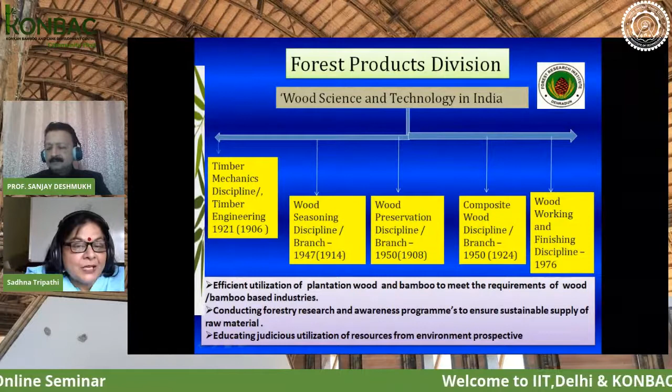The next one is composite wood, which deals with composite products like panel products, and every section has an expert team. The next one is woodworking and finishing, where we develop finishes and their correlation with moisture content, how much finish is required for bamboo or any wood species. We are basically focusing on the efficient, judicious utilization of wood and bamboo.

We conduct forestry research, awareness programs and capacity building programs. Besides that, we have a university also, the Forest Research Institute deemed university. We are running different post-graduation courses, and wood science and technology is one of them. So we have technical manpower trained in the particular department. Next one, please.

So I have just shown the recent work we are doing. Bamboo extract I have already described. In the preservation branch, we are working on fire retardant preservative compositions. The preservative is basically for the longevity of any product. But when it is combined with fire retardants, we have to develop protocols for how it works, so that it gives protection against biological agencies as well as fire. We are also working on durability assessment of bamboo in the field.

It is not only the development of the preservative. Recently, we have developed an eco-friendly preservative called ZIBOC, which is accepted in the Bureau of Indian Standards 401. It is environment friendly and comparable with the conventional preservatives ASCU and CCB, which are known all over the world for their efficacy.

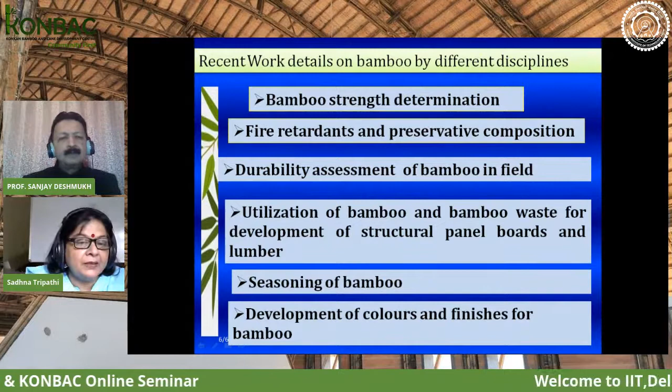On the basis of that, we develop the preservative. So we are developing eco-friendly preservatives. We are developing the preservative plus fire retardant combinations. We are testing it, and so on. And the next branch is we are also working on the bamboo waste and development of structural panel products in the composite branch. Seasoning of bamboo I have already covered. Then the color and finishes. Next one. Next one, please.

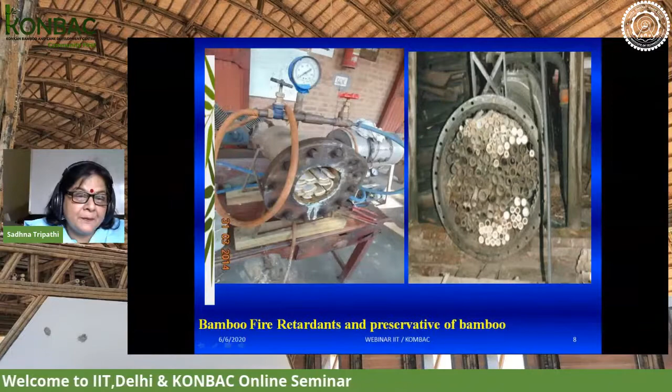It is performed in the wood, it is performed in the bamboo, it is performed in the ply products. So it is a well developed plan which we do here. Whenever we report any preservative or any product, it is mandatory to go through all these tests. Only then we can report, yes, this product is working. Next, please.

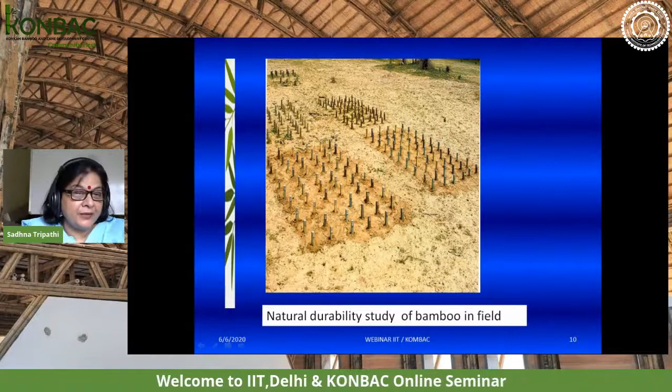This is a yard test. You can see that a certain size of the sample is embedded in the ground after treatment, or we take the control at different locations, and periodic inspections we conduct. And it is recommended that if the product is working for 10 years, then you can say that this product can be recommended. So ZIBOC, we have already tested it for 12 years. So after that, it was accepted in 401 standard, and now it is going to be printed. So this is a sort of thorough examination of any preservative or any wood or any bamboo which is treated. Next one.

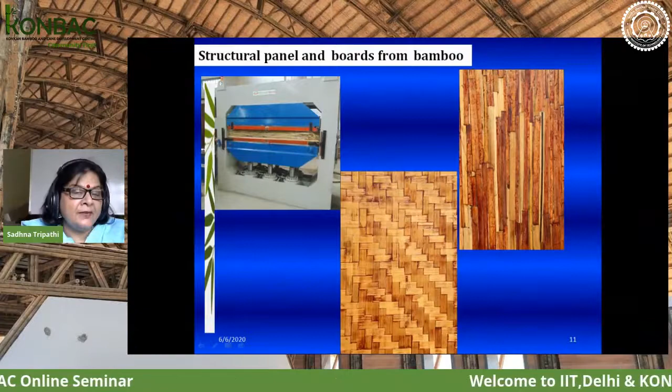This is the structural panel boards. We have a full-fledged laboratory where we have the press, hot press. We make the products, we test it, and developmental. There are so many things in the developmental phases, but still there are many things ready for the field also. Next, please.

We are four speakers in the session. I know that everybody will be talking about why bamboo, but I'll be talking from the forestry perspective only, from the forestry point of view. We know that it has faster growth. Why? Because only the longitudinal growth is there. There is no lateral growth. If you see the tree, you will find the secondary wood and the primary wood, and the sapwood and the heartwood. Whereas in case of the bamboo, we don't have any wood. Only the longitudinal growth is there. That is why the growth is very fast.

So the advantage is that faster growth is there. In 4 years or 5 years, you can have this material, and it can be harvested annually, non-destructively. You are not going to harm. You don't have to dig out all of the material from the soil. Again, through rhizomes, it will be flourishing there. It will regenerate the degraded land. It can be intercropped with the shallow-rooted crops. It helps to prevent soil erosion, and there are so many properties. That is why we say that bamboo should be used and should be considered in place of the wood.

Next one. Madam, will you be able to wind up within 3 to 4 minutes? Yeah, sure. Why not?

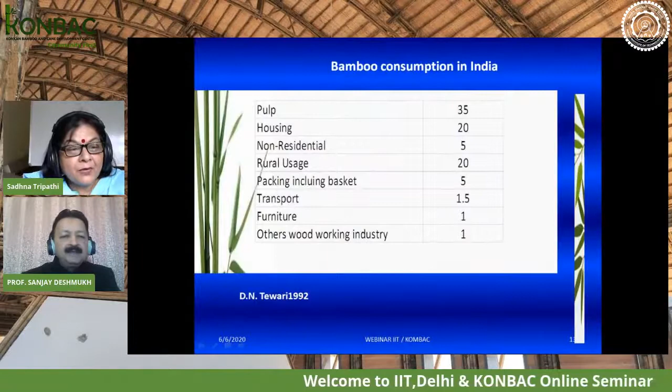So this is just the data. You can see that 35 to 40% goes to the pulp, whereas for non-residential and residential purposes, almost 40%. That means that we are well on the ground. That is why we should justify why we should use the bamboo, because more than 40% goes for this sector. So we should again think of using this material. Next one, please.

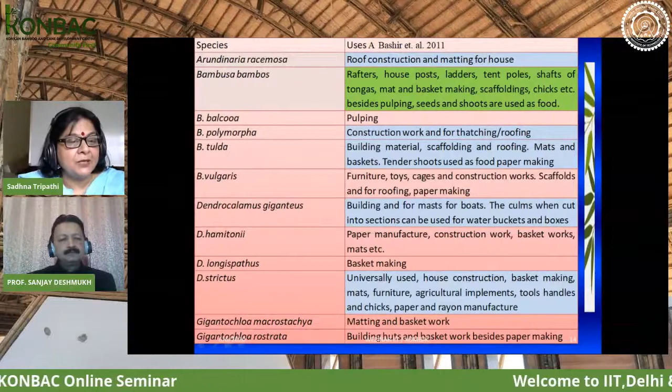These are categorized on the basis of their structures. You can see that many times people are asking for this: we have this bamboo, for which use should it be? We have a long list. I have shown one, Bashir et al. In 2011, he categorized all sorts of bamboos for different uses. Next one, please.

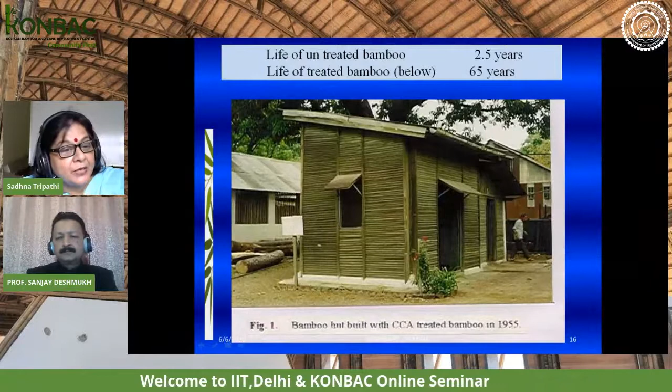This is a hut which was made in 1955. This is a plant area where we work, and it was made in 1955. Now 65 years have already passed. You can see how much longevity is there. Otherwise, bamboo has a natural durability of 2.5 years only. So you can see it is in the open and it is working. Next one, please.

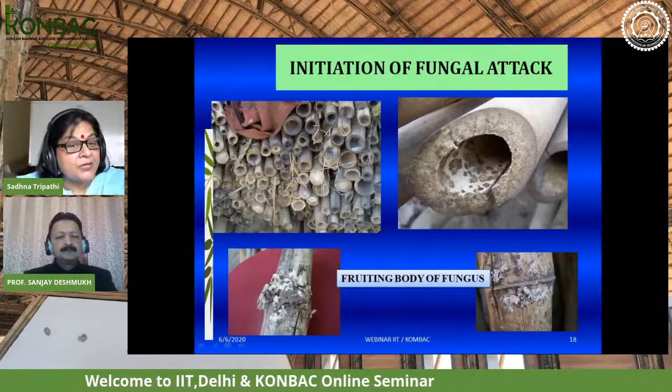These are the conditions which are basically responsible for the decay. Next. This is the initial stage. Whenever you see any sort of infestation, you have to remove the material from the lot, because this shows that all conditions are favorable for attack. Next. These are all sorts of molds, and they are just decreasing the value of the product. So we have to check it. Next.

These are the termites, the borers and the pests, especially beetles, powder post. They are enemies of the product.

Next. Madam, you have about 1 minute. Yeah, sure. Now go to the next one.

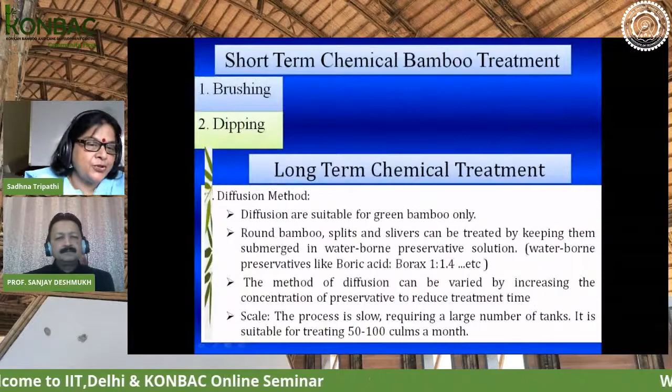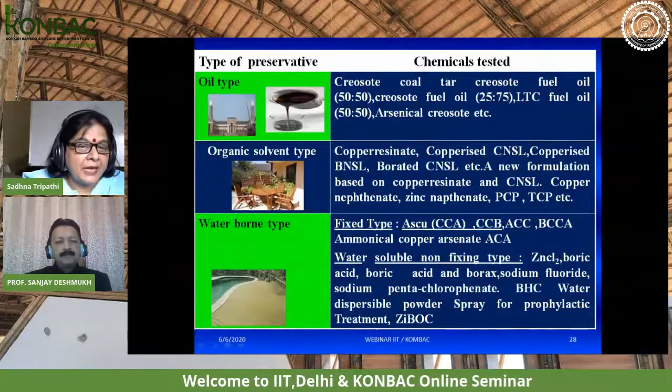So this is how we check, how we treat. Next. These are the types of preservatives. Here you can see in the third, water-borne: Ascu, CCB, CCA, ACC. These are all preservatives which are water soluble, so no solvent is required. Just make the 4% solution and treat the bamboo. Next, please. These are the procedures. Because of the time constraint, I won't be going in detail.

Next, please. Madam, will you be able to summarize now? Yeah, sure.

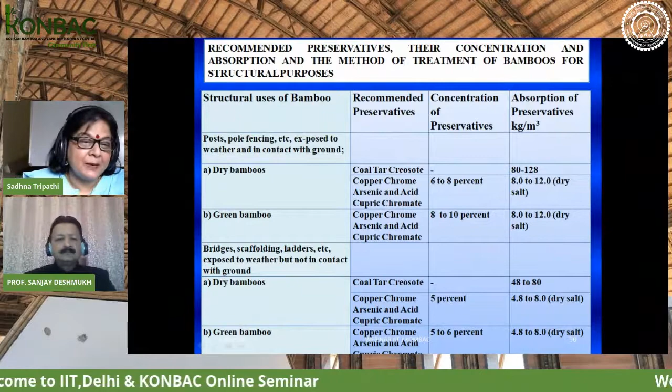These are the different usages. Dry bamboos, you can see in the second column, which type of preservative, what should be the concentration of the preservative, then what should be the retention. Only if the proper retention is there is it going to survive. Next, please. You can have the hyperlink.

Madam, I think you'll have to summarize now within a minute. Okay, can you kindly show that? Just flash and go on.

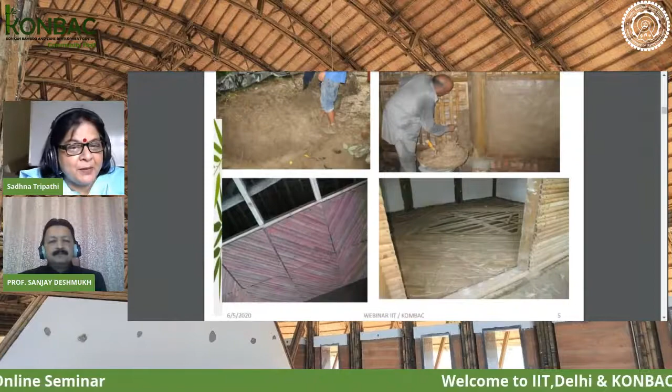You can see how we are making the structure, how we are making the mesh. Next, please. We have made the structure. It was made in 2008 with the preservatives. The floor. Next, go ahead. How the mud is with the fire retardant and the preservatives. Next, please. The floor. Next one. These structures we have already shown you.

The shed was made in 2006. Still it is there. So now you can calculate the economics. You have saved the material, the money, and the labor for 10, 12 or 15 years. So that is the simple justification for why we should preserve wood or bamboo. Next, please. These are the recent works which we have done in the green skill development program.

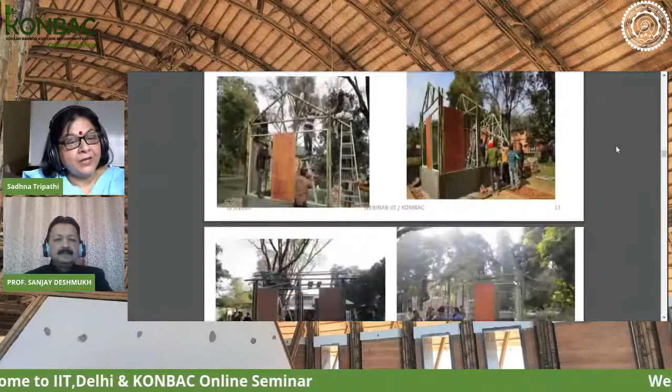Educated crowd was there, youths were there, they were trained in all sorts of structures. All treated structures are there, and we hope that it will be there for the next 50 years. That is all. Thank you so much.

Thank you very much, madam. And as all of you must have heard, madam, it was such a lucid presentation, and the expertise of madam in the field of bamboo development was evident from her presentation.

We have our second eminent speaker, Dr. Vipin Chawla. Dr. Vipin Chawla is working as a scientist E at IPIRTI, that is Indian Plywood Industries Research Institute, located in Bangalore. Dr. Chawla has been working on various aspects of sustainable byproducts of wood, and bamboo is one of the very prominent aspects of this particular research. Dr. Chawla has also been expert in fundraising and also implementing the projects on sustained basis. Today's presentation will be based on bamboo composite technology for housing structures.

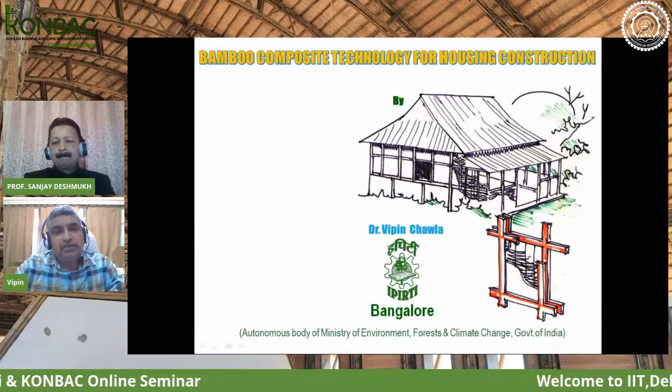Please upload the presentation. So, the topic given for today's discussion is bamboo composite technology for housing construction. IPIRTI has done a lot of work in establishing a technology, especially the bamboo composite technology, and implemented it in structures. Next, please.

So, as we have already discussed, there is easy availability, low cost, high strength to weight ratio, capacity to absorb more energy, and it is a renewable resource. But it has a drawback also. It has limited durability. Madam already discussed that. We have to treat it properly, otherwise it does not last for more than 1 or 2 years. And it also has a drawback in jointing of the structure, so we have to develop a jointing technique. We have done work in this line, and structural design data is also not that much available. Limited structural designs are available. Please next.

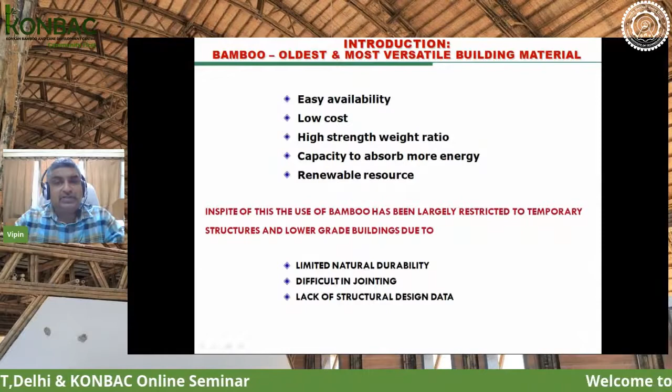So the advantage of structural application of bamboo is that it is easy to cut to the required size with a simple tool. We do not need to buy specific heavy machines or heavy tools to cut it. And the surface is very clean because it has a silica layer, and the epidermal layer is very hard to attack. So it is hard and smooth, and hence less wastage. And nodes add strength to the bamboo because of more lignin content in the joint; it has very good tensile strength, and skilled labor is not much required. Just giving a little instruction to the labor, they can handle it easily. And now it is under the National Building Code also. Next please.

So based on bamboo properties, MOR and MOE, modulus of rupture and modulus of elasticity, and maximum crushing stress, bamboo can be classified into three categories: group 1, group 2, group 3. Based on this group category, the structural engineer can decide which type of bamboo group can be used for the structural purpose. Next, please. Next.

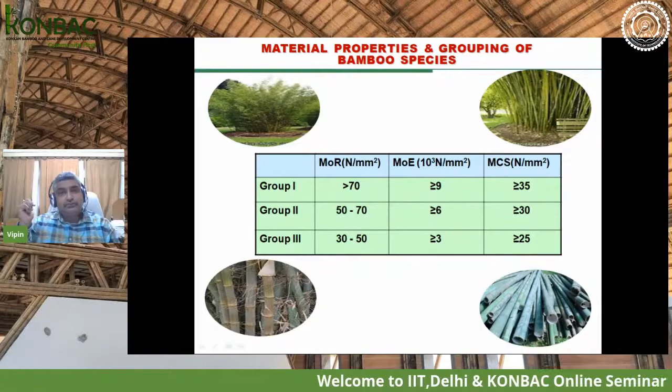So bamboo for building structures: affordability. Bamboo foundations are very minimal. Basically 2 feet of digging is sufficient and not much width is required. The foundation is simple, no heavy reinforcement of metal or other things required. Sustainability and environmental impact are there. Bamboo is available commercially in large quantity and the supply system is very good.

It's a good source. But during construction, we have to select only specific species of bamboo, and that species is the Balcooa species, and before application we have to treat it. It is a traditional material, so it is not a new material, it's a very old material, but we have to use it in a better engineering way. The result we can see in the next slides. Next, please.

So for building systems, we have to treat the bamboo as much as possible with the proper retention so that it can be long lasting. And nailing is not possible in the bamboo, so we have to wire it and bolt it, or make jigs, bolts and the like to make positive connectors. And modular construction is like that. It's suited to either prefabrication or fabrication to make a design, and in one place we can construct the structure.

So now we are going to the bamboo composite technology. We design the composites in the lab and plants, and then we can create structures in one place and shift them to another place. And the assembly is very easy, just simple nuts and bolts, tie it and install it, like in the construction of the metro bridges and all these things. Next, please.

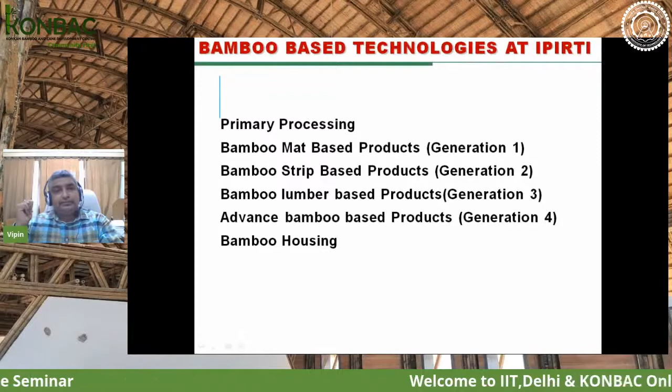And all of these generations we are using in housing construction. So the purpose of this bamboo composite is to implement it in the bamboo housing structure. Next, please. So the primary processing consists of various lines of machines. The first machine is cross cutting, then the second machine is splitting, which splits the bamboo to the required width and thickness. And then we have to remove the epidermal layer and endodermal layer, which is not good for bonding purposes. And next is the slivers making. Next, please.

So after this slivers making and all these things, it has to go to the rural livelihood program. So it can be utilized, it can generate a lot of employment in the village area. So for mat sliver-based products, IPIRTI developed bamboo mat boards, bamboo mat veneer composite, bamboo mat composite, bamboo mat screen doors, bamboo mat corrugated sheets, bamboo mat ridge caps, and bamboo mattress. So these products are all developed from the mats. Next, please.

After this, we realized that mat-based products require a lot of manpower, so we went to mechanized products. So horizontal laminates and vertical laminates are the two products which can be used for flooring and other wall paneling purposes. In both the bamboo mat-based products and the strip-based products, the resin is common, phenolic resin. The specialty of IPIRTI in developing this composite technology is that we standardize the resin as per the product's requirement. So that technology is with us.

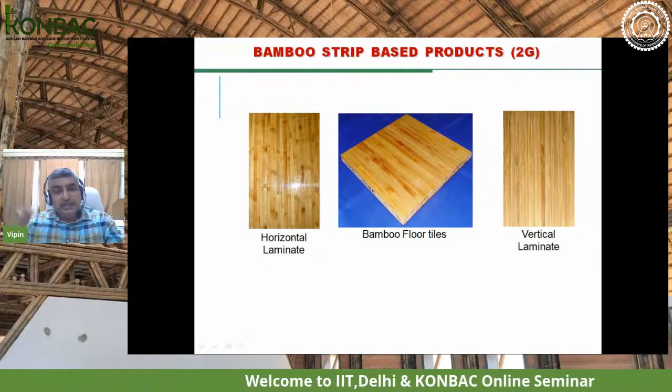Next, please. So we use these strip-based products for construction of theaters or stairs, or in halls or badminton halls. Next, please. So you can see the application. These are the applications of the laminates. So it's well defined. So the next product is the bamboo lumber.

As we know, bamboo is used for structural purposes, but in round shape it is very difficult to manage it in strip form. So just squeeze it like sugarcane in a machine and make a crushed form. So the first slide shows the crushed part, and under pressure and temperature, cold press or hot press, we can make it into lumber form. So this is like 6 feet by 6 feet length and 5 inch by 6 inch cross-sectional area; the lumber is produced in India by 2 or 3 companies.

So we have to treat all these things. We have to dip it in the resin, we have to press it, and then we have to cut it as per the requirement. Next, please. So these are the applications of the bamboo lumber. So the bamboo strip-based product is the second generation. Lumber is an advanced generation product. It's a highly finished product. Next.

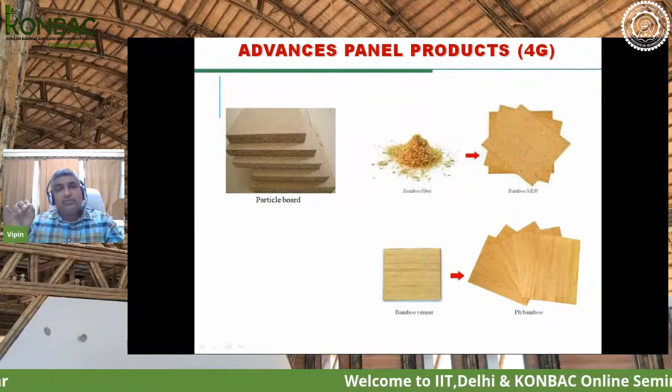So next product, which we can use to minimize wastage, is particle board and MDF. We just crush it and pass it to the press, and the press converts it to the board. This is also a good product, but due to high investment, not a single industry in India has it. So it is a big project for us, and it requires a lot of bamboo for processing.

In IPIRTI we have developed a TRADA technology. IPIRTI TRADA technology defines how to use the bamboo and makes it possible for engineered wall structures and all these things. This has already been explained by Sadhana madam, so I am not going to go in depth.

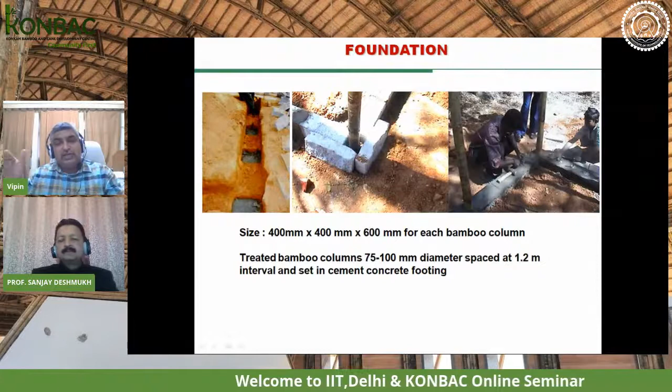While erecting these columns, we have to treat the ground also, otherwise termite or borer attack will start from this. We use suitable chemicals with good penetration effect, and we have to take care while treatment. The treated bamboo columns come in 75 to 100mm diameter with wall thickness of 10 to 12mm. Selection of the bamboo is a vital parameter for constructing the house. If the bamboo is not properly treated and not properly selected, the building may collapse, so we have to give importance to all these parameters.

Before the plinth and flooring, we have to use bamboo strips only. Normally wall thickness may be 9 to 12 inches, but in bamboo composite houses, the wall is about 3 to 5 inches. We reinforce the strips with chicken mesh using the same cement mortar ratio. This is the structure, how we use it for the walling purpose in IPIRTI.

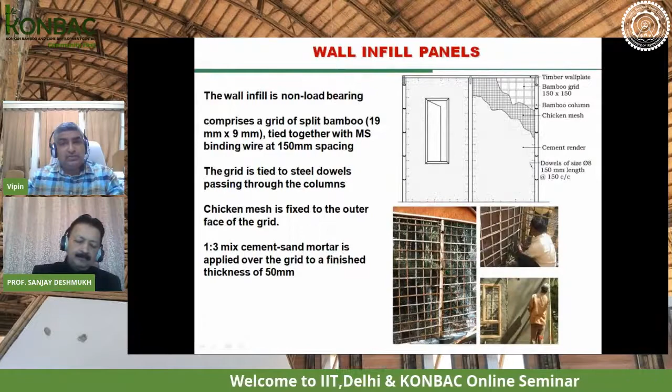And we have established this house all over India in maximum places.

So we use the corrugated sheet, utilizing it for structural purposes. We make it possible with clamping, J-bolt fixing, and all these things, but I will not go into details.

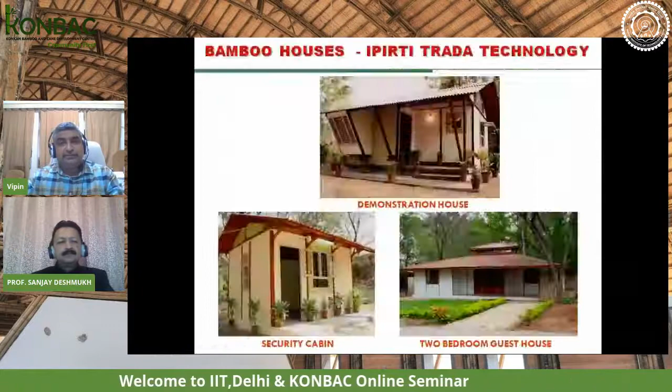So these are the various constructions we have developed in various places. You can see them here.

This is a prefab house. In this house, we do not use cement; the structure is constructed at some other place and installed at the site. These structures, first we put with the wooden structure, and second we create on concrete and iron structure.

We basically use bamboo mat board for the prefab house, double walling system. It has good high rigidity compared to plywood, good flexibility, and can be used for gussets and hollow beams. The double walling system gives better acoustic properties and better thermal properties, adding good importance to the building.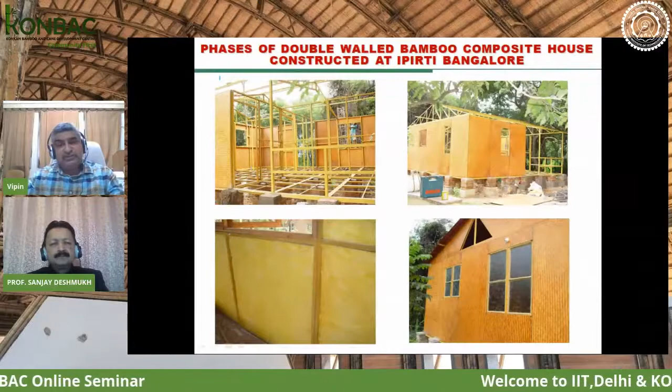See how nicely we use bamboo with the material of metal only. 100% bamboo is not possible; we have to use another material also.

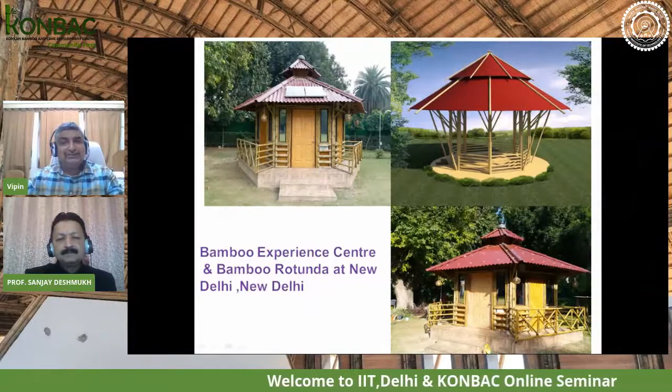This is a totally prefab structure. We developed this at different places in India. These are demo houses to give information to the public, to help them understand it.

Basically, the reason we develop these structures is to show that they can be erected and last for 50 years, it is possible for them to live that long.

For the testing part, as madam already showed, before constructing anything we have to test it as per the building standard codes.

It has good fire retardant properties. We have done roof pressing tests, flame tests, load bearing tests, and shock resistance tests, because in earthquakes normal buildings can develop cracks and may collapse.

But bamboo has a good property. Once the earthquake shock comes, it absorbs it, and after some time it regains its shape, so it will not give a negative effect on the buildings.

This passed the zone 5 seismic test methods, and we added it to the national building code also. This is the beauty of the bamboo material.

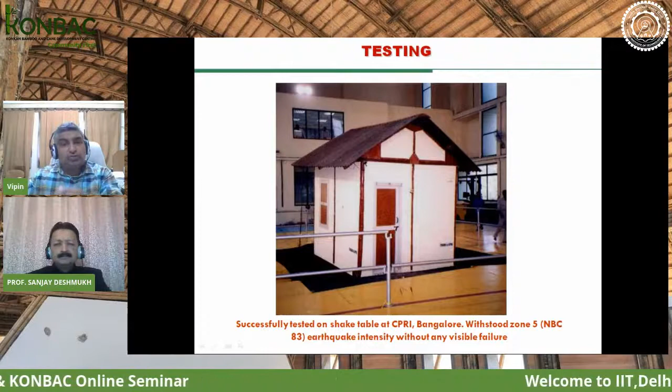We are using an excellent material without much knowledge, without much scientific work, but it is one of the best science materials to use for construction purposes or other interior applications.

We are also developing bamboo roofing material, such as this bamboo corrugated sheet. It is eco-friendly, highly resistant, low weight, low thermal conductivity, and aesthetic. Compared to asbestos sheets or galvanized iron sheets, this material is far better.

We need bamboo mats to develop this technology. It also has good scope for green structures and green building material.

We developed the techno-economic viability analysis. The conventional construction technology, along with the spiraling cost of traditional building materials, makes houses unaffordable for an average income household. Bamboo wall-based houses are energy efficient and save 60% of the cost compared to masonry construction.

It is not a costly construction, but if you add more high-end applications, the cost varies person to person; adding more increases the cost. So again, compared to other structures, it is cheaper, but it is not cheap without technology.

We have to use technology, otherwise it is harmful. Maybe after 2 or 3 years, the building may collapse if you do not use the proper technology.

Sir, can you conclude within a minute? My slide is now the conclusion.

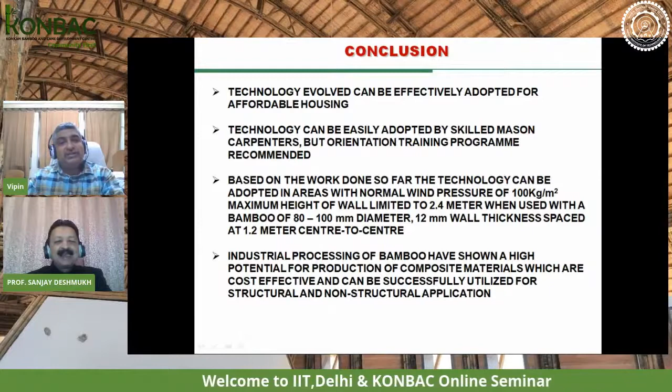The technology evolved can be effectively adopted for affordable housing. It can be easily adopted by skilled masons and carpenters, but an orientation training program is a must.

Based on the work done so far, the technology can be adopted in areas with normal wind pressure of 100 kg per meter square, maximum height limited up to 2.4 meters, when used with bamboo of 80 to 100 mm diameter with half-inch wall thickness and a 1.2 meter center-to-center structure.

My suggestion is that without proper technology, one should not go blindly into building bamboo houses. Use proper instructions and guidance, and with a minimum of 10 people trained, then use it.

For anything you need regarding structures or composite technology, we have a full team working in this line across various departments. We are also working on how to make a high-rise building with bamboo structure; that is ongoing. In the next webinar, you will see future research in this area. Thank you very much to the listeners.

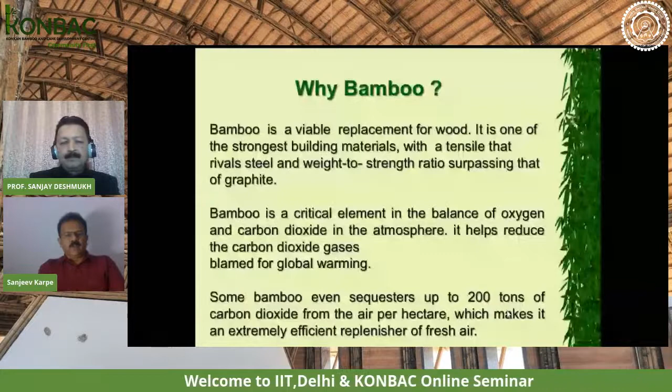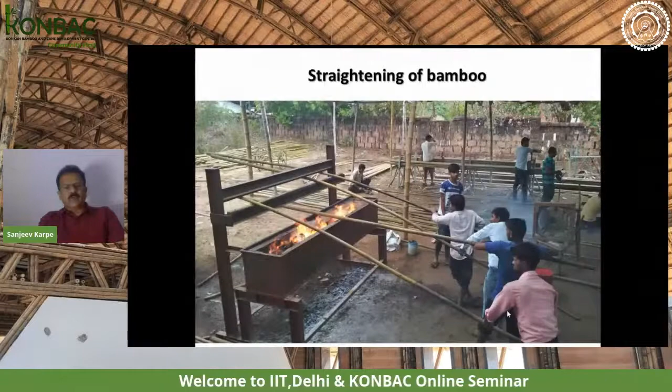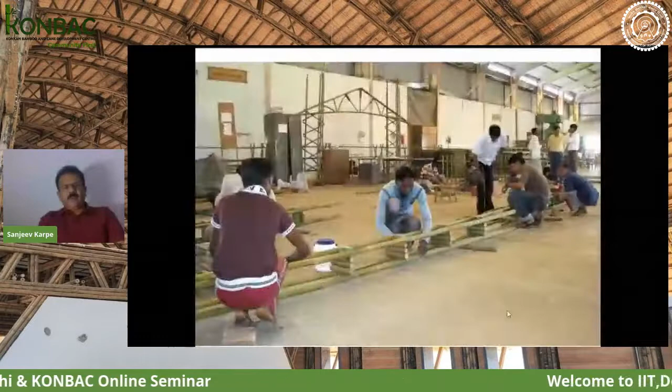So in 2004, we decided that we will set up an organization and start working in bamboo. The first thing we did was setting up a pressure treatment plant to increase the durability of bamboo. Every time you may not get a straight bamboo pole, so you need to have a facility to straighten the bamboo. We trained our local artisans to do straightening using this very traditional method, and if you use highly skilled labor, you can absolutely straighten bamboo like a pipe, bent very uniformly. Once you have treated and graded raw material, making any product is very easy. We started prefabricating structural components, starting with small cottage type constructions where the column and trusses are prefabricated as a unit. For trusses, we initially used a gusset plate made of bamboo mat board, and slowly eliminated even the gusset plate, using complete round bamboo for making trusses.

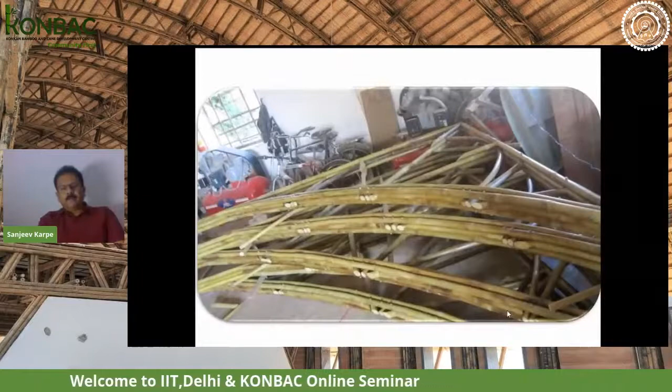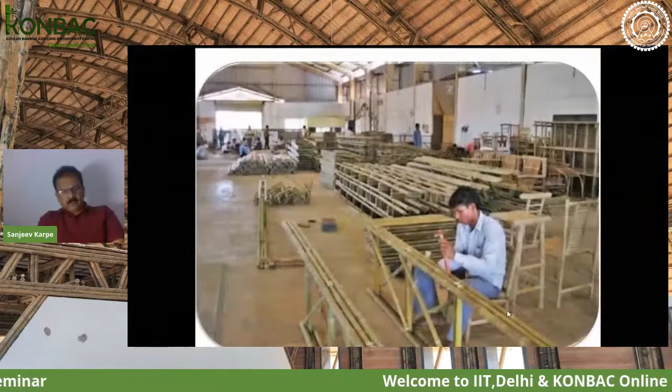We started doing cottages in different places and got a good response. We always took care that the product should look good aesthetically, it should be beautiful, as well as durable. We got excellent response from our customers, which motivated us to do bigger work. So we started doing bigger structures, again prefabricating components in the factory for bigger structures too. For bigger structures, you need a stability certificate from a structural engineer, and because bamboo is a bioresource, you may not get uniformity in the raw material. So initially we started with load testing methods, most of which happened either on site or in our factory.

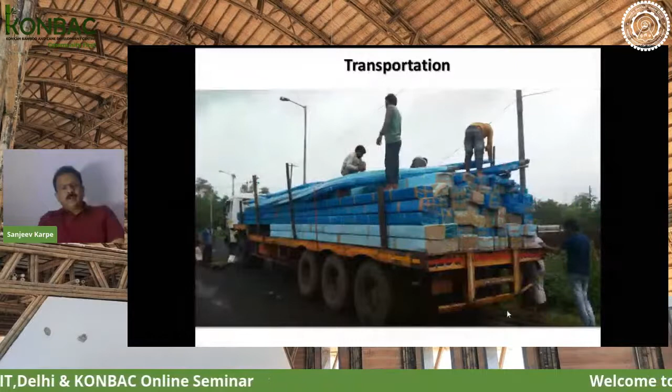Once the components are ready, they are packed and sent on bigger trailers to the site, and we started assembling components on site. So we got a chance to construct a really big structure in Hyderabad for a builder, Organo, in Aziz Nagar. This is a 10,800 square feet structure with a 64 feet span. This structure gave us the confidence that yes, in India we can also do good bamboo structures, just like what we see abroad. And after that, we got an opportunity to work for the government of Maharashtra.

This is a research institute belonging to the forest department. And to tackle the bigger project, we don't have the required strength. So we tie up with a company called Jans Bamboo, and with that effort, we could bring in the best of the management, best of the practices, and

then we started using, for the first time, Bambusa Balcooa as a raw material for a structural member. So typically 100 mm of dia, and we started doing construction with Balcooa. Because Balcooa is more in dia, there is a limitation of bending. So we restricted to not much bending, but reasonable bending with Balcooa. And we did this type of construction using mainly Balcooa as a raw material with around 100 mm dia, 80 to 100 mm dia material.

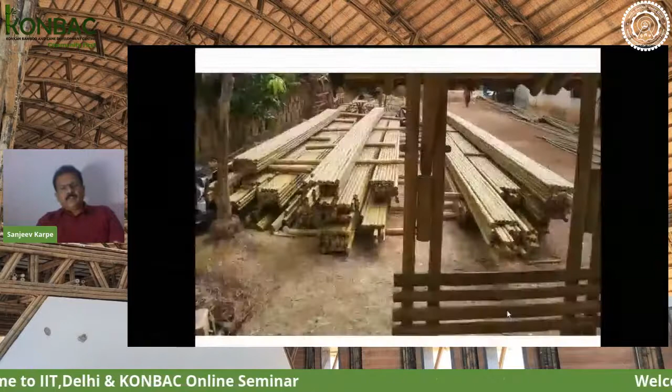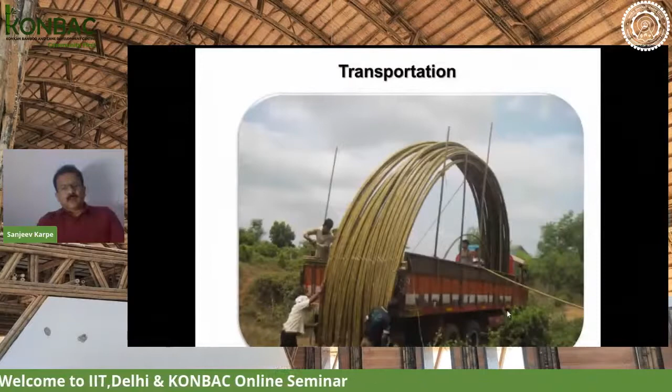Then we shifted to a smaller dia bamboo called Dendrocalamus stocksii, which is locally available in Sindhudurg district, with 40 to 50 mm dia. And we thought that we should be able to make even bigger structures with the smaller dia bamboo. So we did this also using 50 mm dia bamboo, got excellent response for doing a bigger, larger span structure with the smaller diameter bamboo also. And after the successful attempt with stocksii, we started using stocksii for the bend components, and bending was much more than what we used to do.

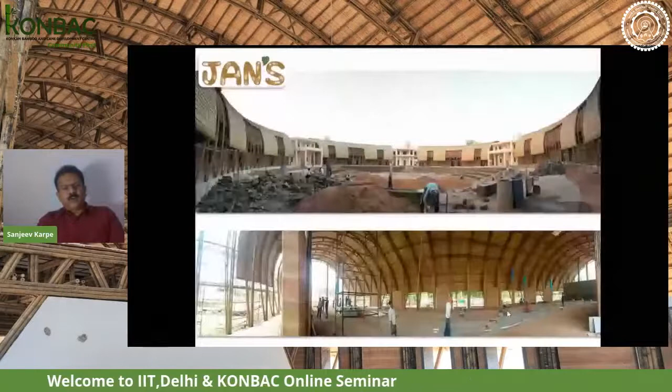We started doing that in a structure, and this particular work is done again in Chandrapur by Jans Bamboo. And this is the combination of Balcooa and stocksii. So all the bend members you see here are stocksii, which is 50 mm dia bamboo, and all the straight members are Balcooa, which is 100 mm bamboo. So this combination also worked well. The only issue we faced for this particular structure was that it was around 1 lakh square feet of total area covered in that campus, around 11 buildings.

We thought that now we need to do more prefabrication in a factory and less of the work on site. Then the real question was whether our pricing is globally competitive or not. So we decided that we'll go outside India and bid for the work, so that it will give us an idea whether our rates are globally competitive or not. Waldorf Astoria, which is one of the high-end brands of Hilton, was doing a high-end resort in Maldives at Ithaafushi. They had a complete restaurant in bamboo. So we bid for that.

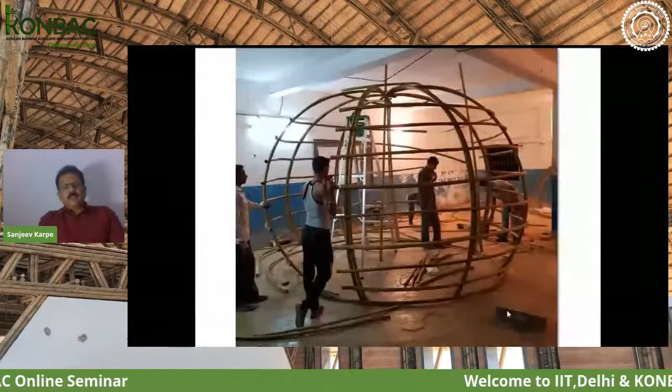We got the work. Then we started doing all the components in our factory in Kudal. These components were first prototyped in Kudal, and then packed and sent to site. And we were able to do this work in Maldives, and this proved that yes, our pricing, our quality is globally competitive. And I'm happy to tell you that this particular restaurant has been rated among the world's top 16 best waterfront restaurants by CNN UK. And this is clear-cut proof that yes, India can do it.

This is Indian bamboo, Indian manpower going abroad and competing with the Chinese and Vietnamese players, and coming out with excellent results. But the only limitation in this work was it is basically craft work. It is done by very highly skilled artisans, and most of the assembling work needs a lot of time. So we thought that to make this replicable, you need to take one more step, and we decided that we will now have pre-engineered bamboo buildings, just like any metal pre-engineered building.

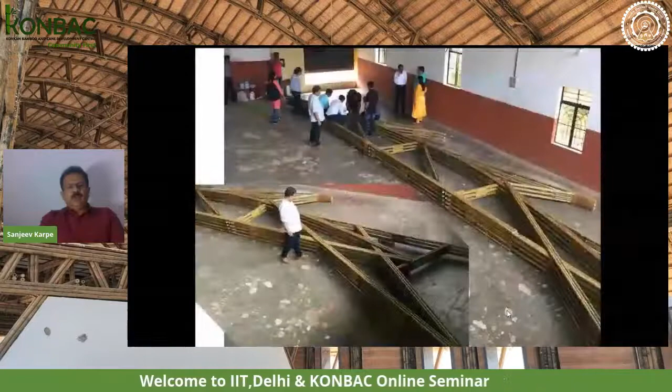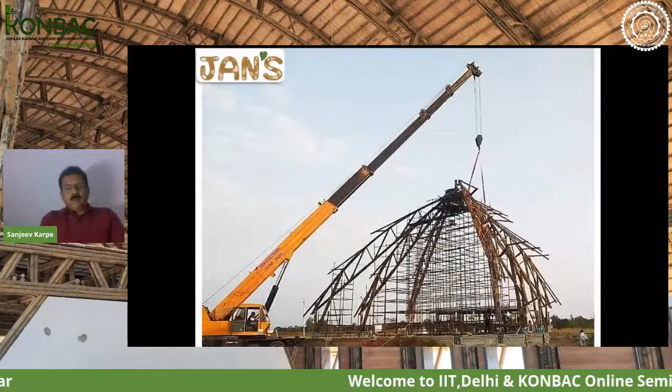We got the opportunity to work with Rajarajeshwari Temple Trust in Hulkoti near Gadag in Karnataka. This is a marriage hall of 500 people seating capacity. So we made the first component in our factory, and all the components were then prefabricated in our factory at Kudal, and this is the actual erection, where you'll see that bamboo is a non-uniform, tapering material, but the accuracy achieved by our artisans is absolute. So it is as accurate as any other metal prefabricated building, and that is the achievement we could get because of our highly trained artisans and the scientific approach Jans could bring in, and the whole game has changed.

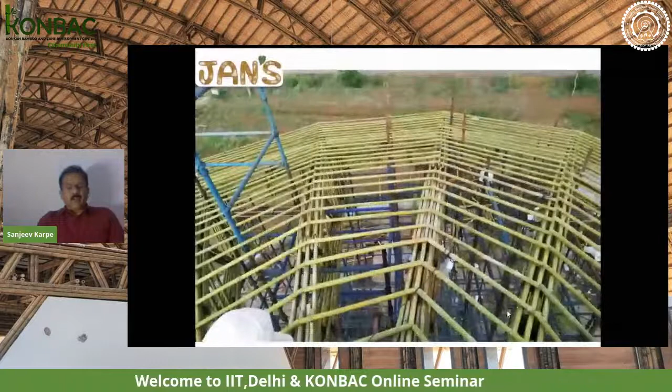Now, whatever bamboo work we are doing, it can compete with any other raw material. It can compete with any player globally. We are getting continuous repeat orders from our clients and other clients from that country. So we have done work in Uganda also, in Maldives also, and it shows that yes, India can do it, and we have the required capability to show that yes, we also can do good work with bamboo.

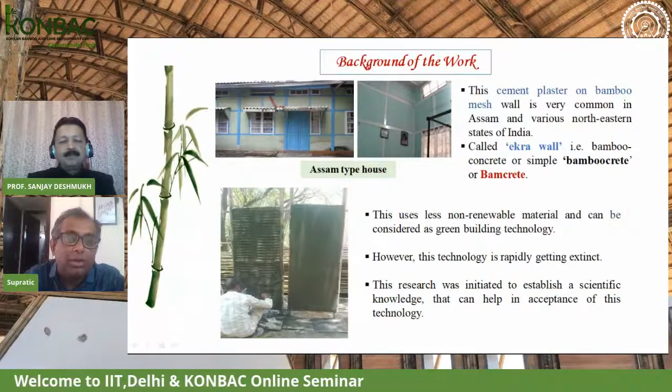I'm also a small partner in the bamboo industry. I've been working in bamboo for the last 10 years. I am from Assam. It is basically a technology which I lived in, in my own house, the Assam type house that I had worked on. It does not look like bamboo, but it utilizes a lot of bamboo. It is based on one of my students' PhD work, Ashish Kumar Das. The first two pictures are my own house where I was brought up in childhood. The bottom part is brick work and the top is the bamboo wall. And you can see how the bamboo wall is made.

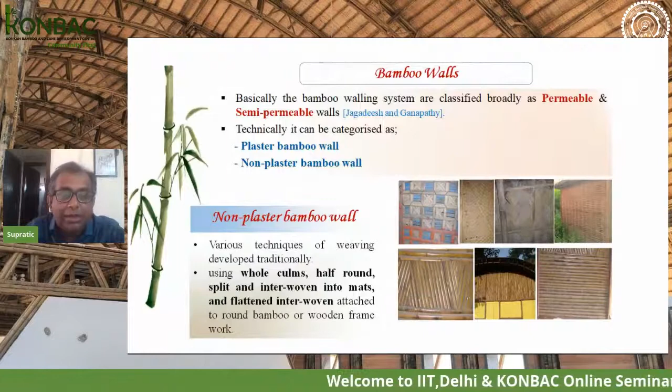It is made with gaps between the bamboos, and the cement across the bamboo gets connected to each other and creates a very, very strong material. It's something like ferro cement, but I like to call it an independent term, Bamcrete. The properties of bamboo, I can skip. So you can see in the past people have made a lot of different types of walls, and most of the time they have not plastered it because they want the beauty of the bamboo. In that case, you have to plaster it, paint it with a painting material, or have a protection mechanism. This is also a different type of bamboo without this thing.

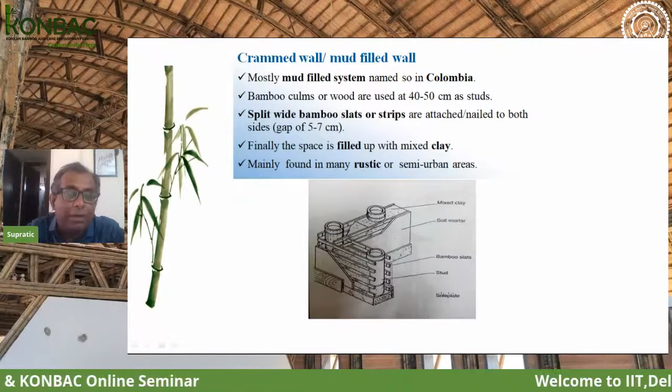So you can see this is the first application where people tried to protect the bamboo with mud plaster. And it was one of the most prominent construction technologies across the world. Same thing. You can see this is the structure. Between the gaps, the concrete binds together. But if you have no gaps between the bamboo, the bottom one, it will not get connected and it will not last. So we need to have gaps between the bamboo.

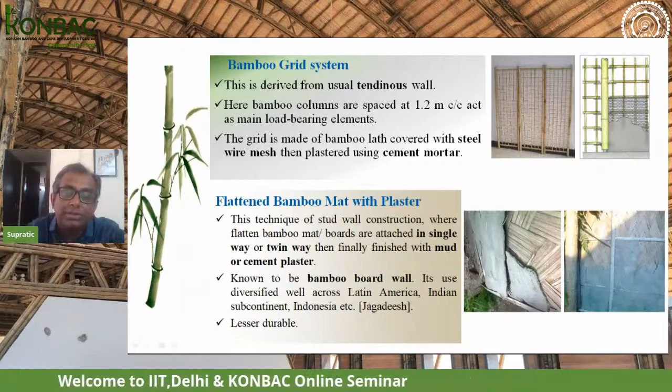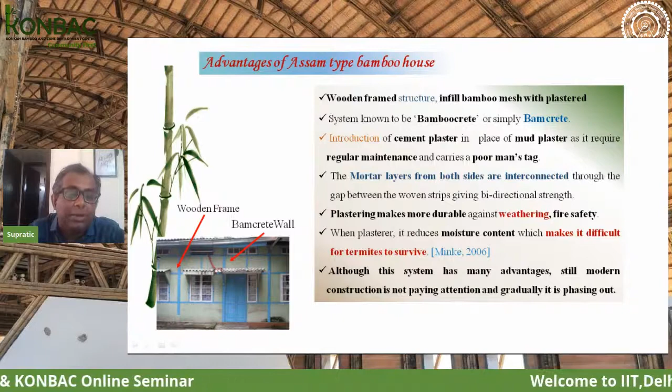I want to mention that we are not so lucky like the central equatorial belt where they get really big size bamboos, or like China, which has very straight bamboo. But the material is still in abundance, and I'm sure all the participants that have presented have utilized this material in a very good way, and the Assam type house is one such application. I will be talking of the policy matters in my next presentation.

Next. Next, let us skip that because a lot of people have talked. Next. So here I have already talked about the construction policy, how the construction is done.

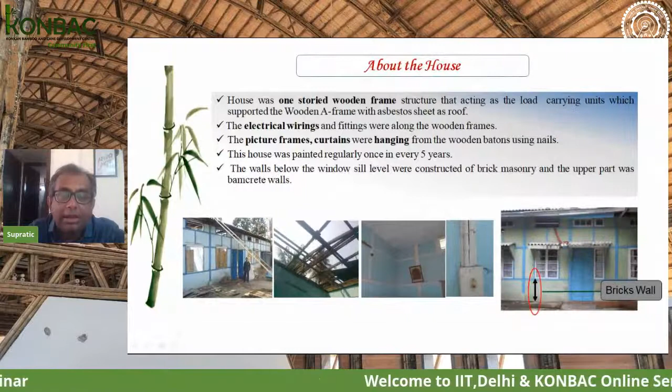Next, let's go. You can see this house after 40 years was dismantled because my parents want to make a multi-storied building out there, and it was a very sad moment. The bricks in the bottom had undergone deterioration, but the top part after 40 years had seen no deterioration. Next.

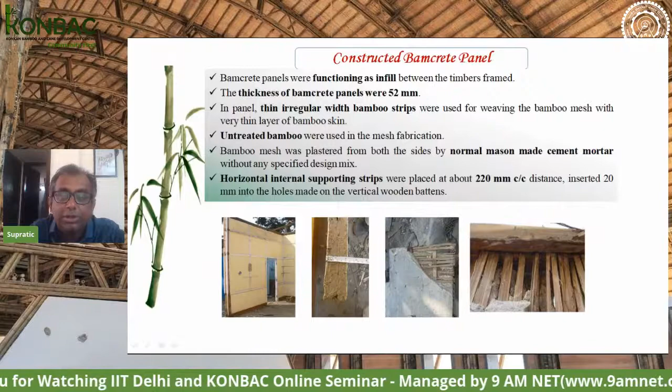So this is the wall, and you can see after 40 years when we opened the wall, the bamboo was not even treated. It was a very poor quality bamboo, yet after 40 years there was no degradation inside the bamboo. So it also means that though we have very, very strong methods of protection of bamboo, inside the concrete, bamboo itself is well protected because it disconnects the food supply or the supply chain for the sustenance of the attack. Next.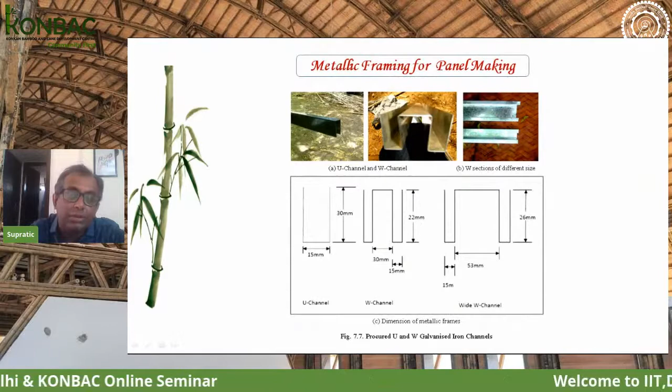So we tried if we can replace wood with metallic joints, and it turned out to be very good. We could say the single U and the W. In the W, I tried to make double panel because in the double panel, it became more resistant to thermal and soundproof.

And at present, I want to tell everyone that we are even testing these panels against blast and bullet resistance. One of my PhD students is now working on blast and bullet resistance of these bamcrete elements. Next.

So you can see how panels are made. Small panels can be made, prefabricated and taken to site, and the plastering can be done on the site. So it is very easy to construct. Next. You can see you don't require metallic connection. You can do connections with bamboo also. In between, in place of wood, you can connect with bamboo also. Next.

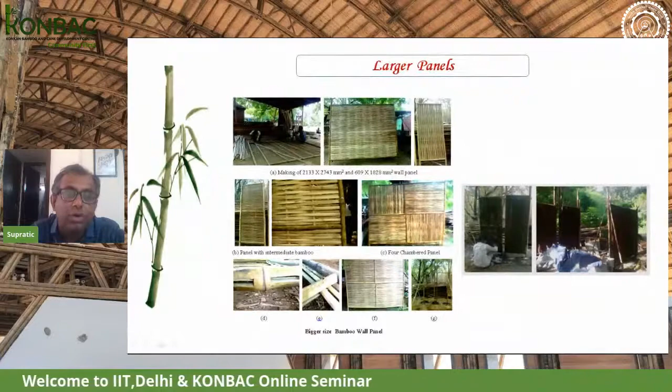So you can see that we tried different types of joints. We used the heated technique. We used bamboo in the corner. So different types of joints were used. Next. Next. We keep on going. Next.

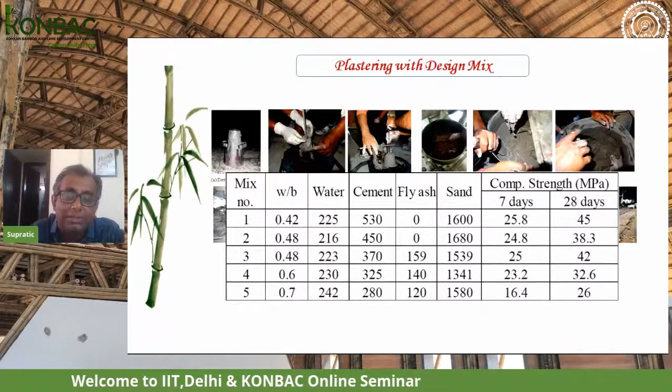So, in place of the mortar mix which people use, because masons generally don't bother about how much water they are using, because they don't use chemical plasticizers to gain the strength. So even in the housing sector, my father is a contractor. I told him, why don't you use plasticizer? Because by using a small amount of plasticizer, you can increase the strength significantly.

So I suggest this industry take a little care and use organized mortar rather than unorganized mortar. Thereby, it can increase the strength manyfold. Next. So we can do the plastering by hand or by spray technique. Next. Next. Next. Next. So you can see the pictures. Next.

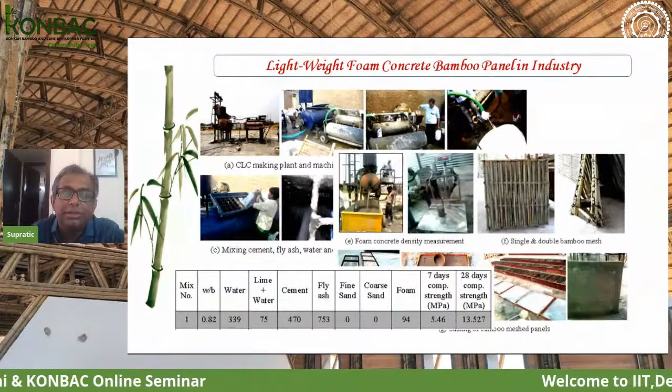So this is a room that we made. We made columns like this. Next. Next. So we made the walls of the room in this way. Next. So you can see how the construction was done. You can see that we could put the wiring inside the double panel also. So we could solve the concealed wiring problem also. Next.

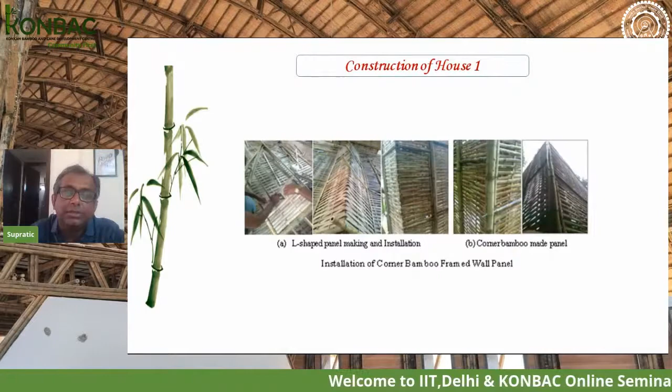You can see the different corners. Next. Next. Next. And it had excellent strength properties because we had used a high strength mortar. Next.

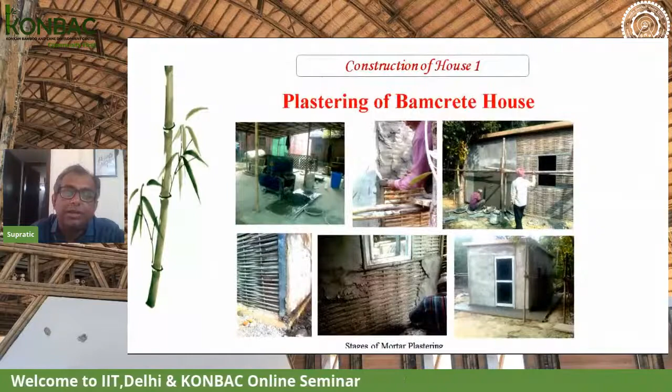Next. You can see this is how the room looked before plastering, the previous slide. In the top middle, you can see this is our room, how it looked bare before the plastering. Next. And in the bottom, you can see after plastering. Next. Next.

So this is the construction of the first house. Does it have a video? Can you play the video? No, not this one. Next. Video is in the next slide.

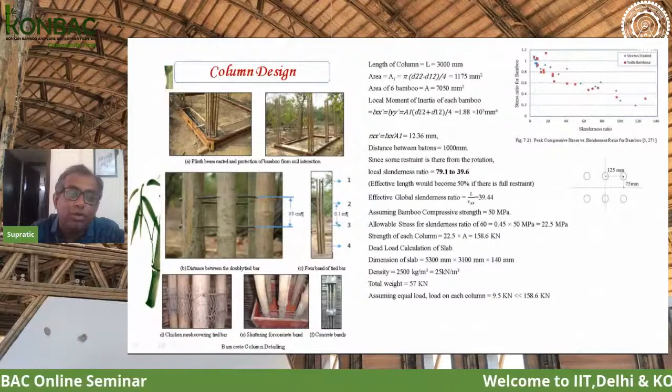Okay, you can see how the plastering was done, how the foundation was done. Obviously, if you do a good plaster foundation, the material will be protected because cement always protects the bamboo in the foundation much better than any other material. Next. You can see how the construction was done. Next. Next.

Now please start the video. Keep jumping and showing it in a fast way.

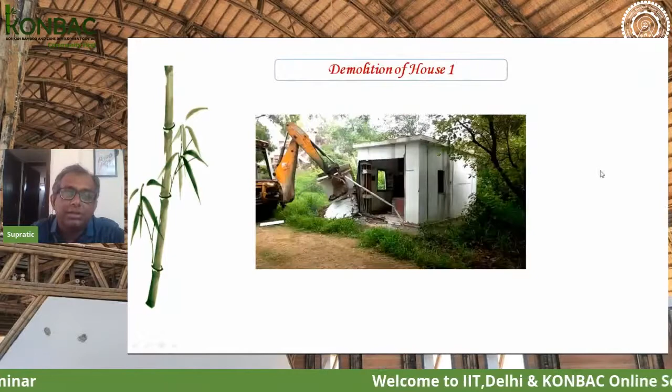Okay, let's skip next. So I basically wanted to say in that previous video that when we broke it, when almost all the columns were broken, the wall was still taking the load, and the wall almost acted like a load bearing wall. So next, let's go ahead. Let's finish the presentation.

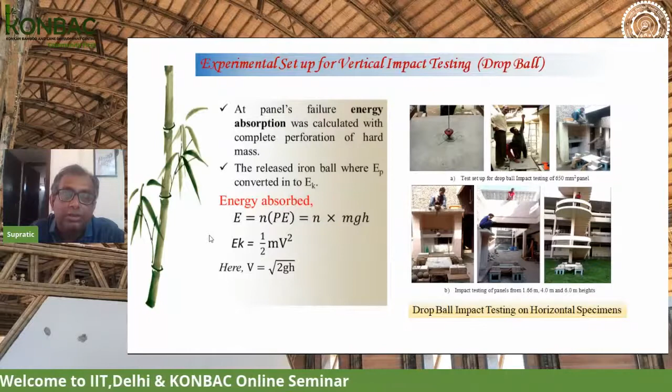We did a lot of different types of energy absorption experiments in this PhD work, and it turned out that this bamboo wall had a very excellent energy absorption capacity, and it also had very good thermal and soundproof characteristics. And we are proposing to the military that in the border areas they can use this material as a bullet and blast resistant wall also. Next. So thank you. Let's stop.

Let's start the other presentation where I will explain to you the purpose of having this group. We have been working in this bamboo industry for the last 10 years. As you can all understand, great work is being done by FRI. Great work is done by IPIRTI. Great work is done by KONBAC. We are also doing quite a good amount of work, but still, our industry is not united. So we had a very strong discussion with Karpeji, and yes.

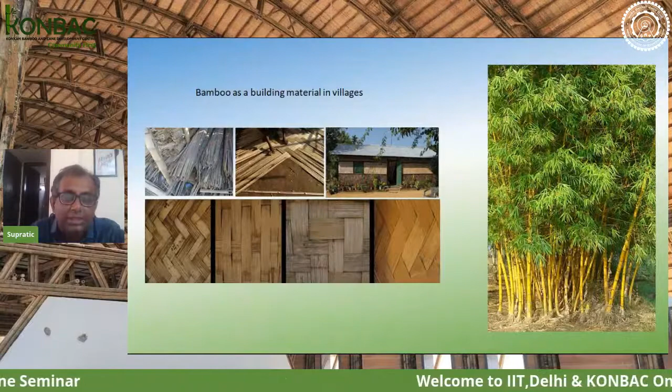So bamboo as a structural material, the challenges and the path ahead. Next slide. Next. So we have already seen bamboo can be used, and bamboo in India is mostly not like in China. It is like bush like this that we grow. Next. A lot of beautiful structures are being built abroad, and we are not far behind. The reason why they are able to do it and we are not is because the quality of bamboo is very different there and here. But just because our bamboo is not so good does not mean we cannot do good structures. So next slide.

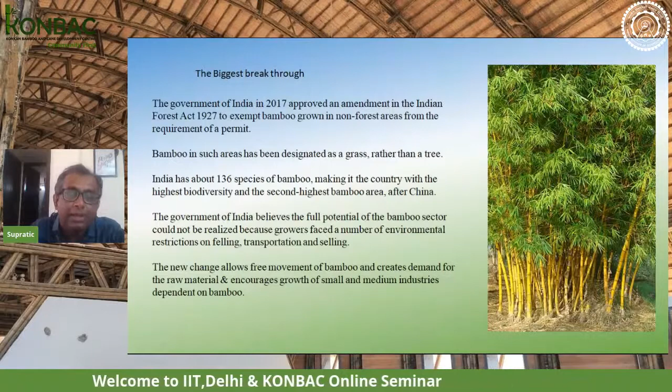One of the most important things that happened in the last few years, and that was also a contribution of Karpeji and their group, they convinced the Government of India to declare bamboo grown in the farmland, not in the forest, as grass that can be cut and transported. Yet, various parts of the country are still facing problems because there is no clarity about the implementation process. So I think the Government of India, with our help, should implement this in a transparent way. Next slide. Yeah, next slide.

Okay, no. So this is the purpose of forming this group. The biggest problem in the bamboo industry is the quality of bamboo, because a 1 year bamboo or a 3 year bamboo does not look different. So we need to ensure that a construction company, when it starts a construction, gets the supply of the bamboo. On the other end, the farmer also needs a guarantee. If I hold the bamboo, I must get my price.

So in this group, I had long been talking about creating a system in which the farmers can be monitored and the buyers can see their bamboo growing online. Because if a farmer has planted bamboo, the number of bushes can be monitored, numbered and even marked, so how much stock they have or how much they have sold can be monitored, and I propose a system where the supply chain is well maintained.

And then we must establish a bamboo testing facility which garners the confidence of the users. Many times the quality of the bamboo is itself a question. We must unite all the people working in bamboo. So in this webinar, basically it was an attempt. At present you saw four presentations, but we could not give full justice to them. So in future, you will hear single presentations of 40 minutes, and all of you will be able to understand that bamboo itself is a material to think about.

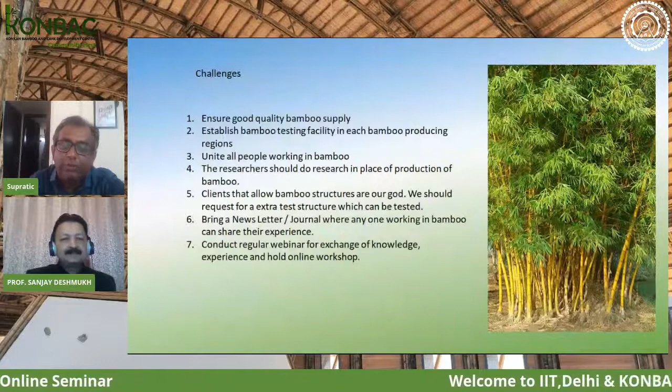Thank you, Dr. Supratic Gupta. I'm sure all the participants must have got enlightened, not only by the very lucid presentation that he has made, but he has shown with examples various structural changes that have been brought about by his research, particularly the bamboo-based concrete, the BAMCrete, and how the technology is utilized. I'm sure the structures shown by Karpeji at international level and the concern expressed by Dr. Gupta can be matched, and probably a global leadership can soon be seen in terms of Indian contribution.